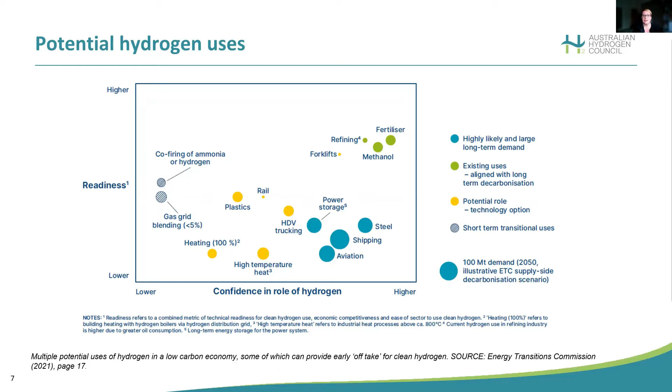We see here that there's also a medium confidence for hydrogen in heavy trucking and high temperature heat processes with different degrees of readiness. And we can also see a high readiness for co-firing ammonia or hydrogen in power plants. Also shown here, we can see very heavy transport, such as shipping and aviation, are less ready, but also represent sectors where hydrogen will need to play a role. And again, for shipping at least, this could be in the form of ammonia.

So this is how the AHC sees the necessary outcomes for the industry, where we use the economic, regulatory and social licenses to operate as a way to frame the issues. Now, the economic license is where we need the industry to get to scale. It's not yet commercial, and the investment gap is more than the private sector will fill on its own.

There's the regulatory license, where the industry needs stable, meaningful and efficient regulatory settings. Customers, communities, investors and our trading partners will all be looking for a degree of regulatory consistency and certainty. And then there's social license, which allows for trusted customer and community relationships. So we're looking at a significant energy and economic transition in the coming years and decades. And collectively, we need to establish engagement approaches, communications and information for a range of purposes. So for us, we're looking to get the policy settings in place to reduce these investment and knowledge gaps, to encourage the market and to really achieve and maintain these licenses to operate.

This is just a little bit more about how we can get to those outcomes in the previous slide. So as we know, we will get there with local and international funding and investment, with strong and positive trading relationships, such as the one between Australia and Japan. There's a need for research and public communications to make sure that everyone is coming along for the journey. And then there's the need for laws, standards, regulations to provide that consistency that I mentioned before, as well as, of course, an industry that is able to comply with those regulatory requirements.

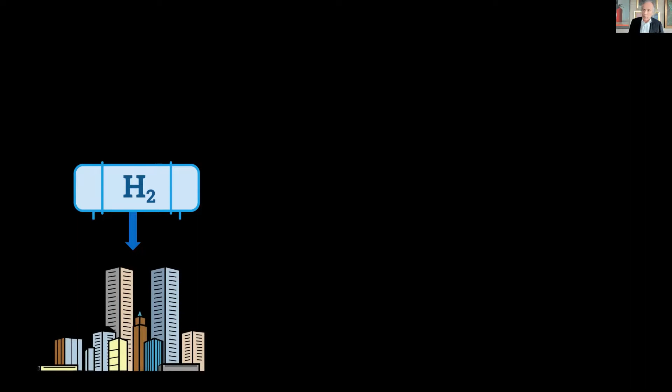The trouble is that even though electricity is incredibly versatile, it's not the most convenient way of delivering energy 100% of the time, maybe 80 to 85% of the time, but 15 to 20% of the time, we need some molecules, a high density fuel or a chemical for industrial purposes. So enter stage left, hydrogen, which can be used in the built environment for building heating and hot water, in industry for steel making and other purposes, and in heavy transport, for long distance heavy haul and for ships, and one day for aviation.

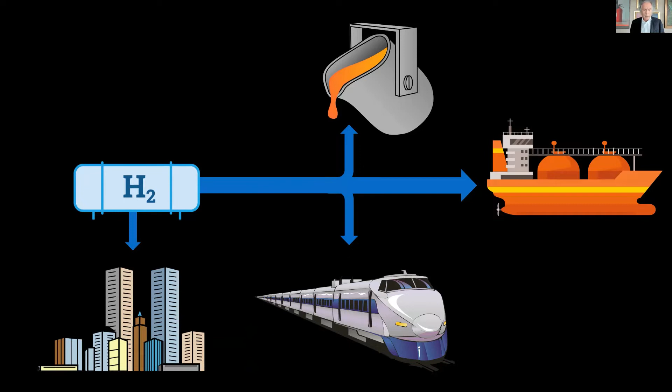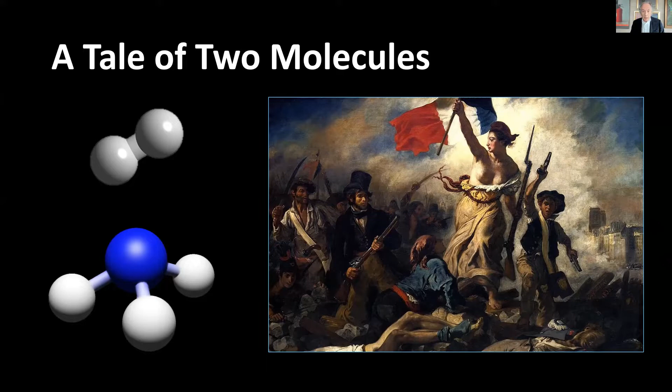And for a country like Australia in particular, hydrogen and its derivatives such as ammonia will be an extraordinary export opportunity. So I am talking about hydrogen, but truly this is a tale of two molecules, the hydrogen molecule and the NH3 ammonia molecule. I'm going to focus on hydrogen, but in many cases, the energy or the chemical value will be distributed and used as ammonia.

I'd like to tell you about the hydrogen dream, but I thought I'd stop and tell you about the hydrogen nightmares, the 3 things that wake me up at night. Even though the prospects are fantastic, there are some things we have to address. The first one might sound surprising: hydrogen storage. I hardly hear anybody ever talk about hydrogen storage, except for NASA.

Now, NASA, for the SLS, the gigantic rocket they're building for carrying 100 tons or thereabouts into orbit and beyond, the first stage is a liquid hydrogen, liquid oxygen stage. So NASA has built a massive liquid hydrogen spherical tank. I can't find how much it costs, but NASA doesn't really understand the concept of millions. It's probably $1 billion, and holds 653 tons of liquid hydrogen.

So if your interest was long-term deep storage, how much electricity is that? A little bit of arithmetic, bear with me. You need 30 kilograms of hydrogen to get a megawatt hour of electricity. That's the chemical content. But with maybe 50% efficiency, you need about 60 kilograms of hydrogen for a megawatt hour, or 60 tons of hydrogen for a gigawatt hour.

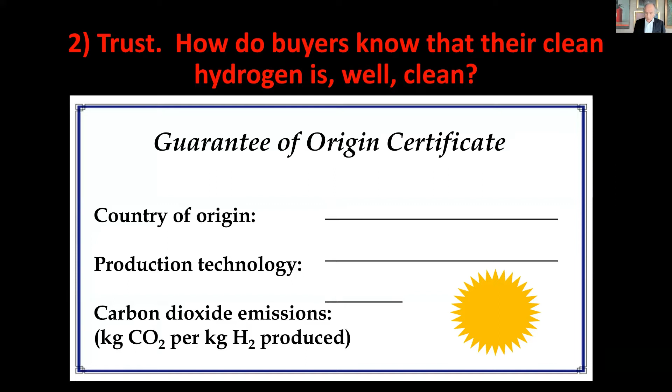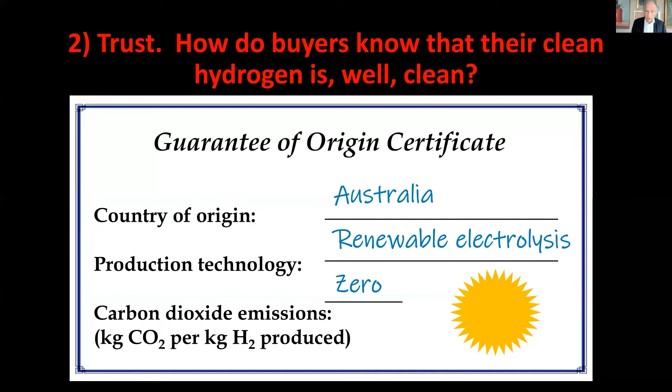The single important metric is how much carbon dioxide was emitted in production per kilogram or per tonne of hydrogen. And the Australian government and international counterparts are developing such a guarantee of origin certificate, but I see that as one of the most important requirements for a credible international trade in hydrogen. And it's moving slower than I had hoped.

So we have a responsibility to build the alternatives. You can't just shut down fossil fuels. You have to build the alternatives that will replace them. And we really don't have a lot of time. When a challenge is long in duration and difficult, the most important time to start is now. And we have started, but we need to build up the speed. And the challenge on building up the speed is more on the demand side.

I am convinced that in Australia, for sure, producers are poised, and we'll hear more about this today, to produce massive quantities of hydrogen. But they need offtake agreements. We need to build the demand. At the moment, if you look at the supply and demand equation as a chicken and an egg, the chicken's much bigger and the egg's very small. So what will make the egg bigger?

Well, if we start using hydrogen in storage for regenerating electricity, that will build hydrogen demand. And the egg gets bigger if we start using it in transport; that will build demand. If we use it in industrial feedstock, if we do gas blending, if we build on that export potential, we will be building demand in Australia and in other countries. Let me give you some examples very quickly of how we can do that.

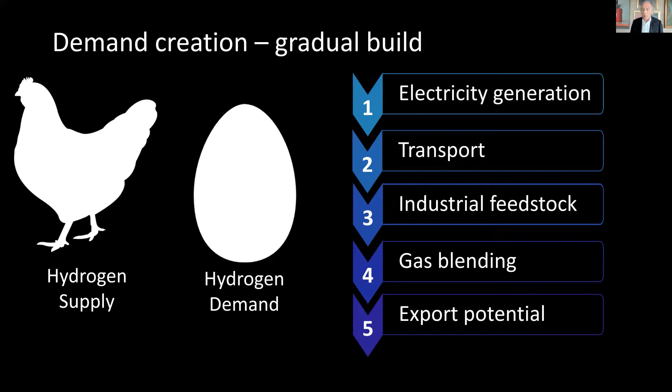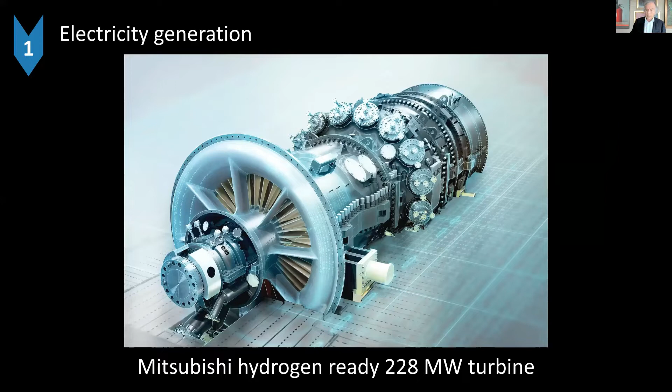Electricity generation: in Japan, Mitsubishi and other big generator turbine companies are preparing their turbines to be hydrogen ready. This particular 228 megawatt turbine is the sort of turbine you can buy from Mitsubishi today that will run on natural gas today, but it's field upgradable to ultimately run on 100% hydrogen.

For the existing coal-fired generators, Japan has a clear strategy to use ammonia made from clean hydrogen in co-firing, and the conglomerate called JERA is quite committed to getting to 20% ammonia in at least one large coal power plant by 2024.

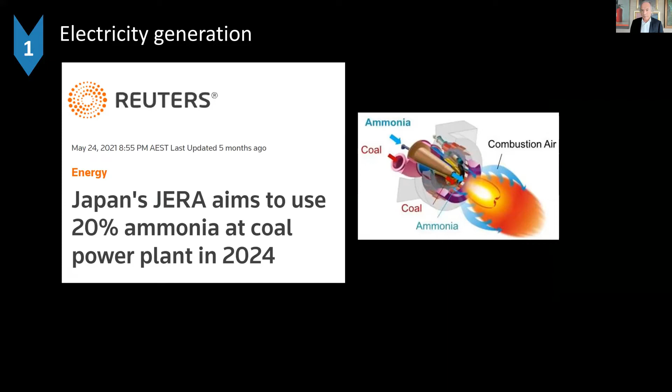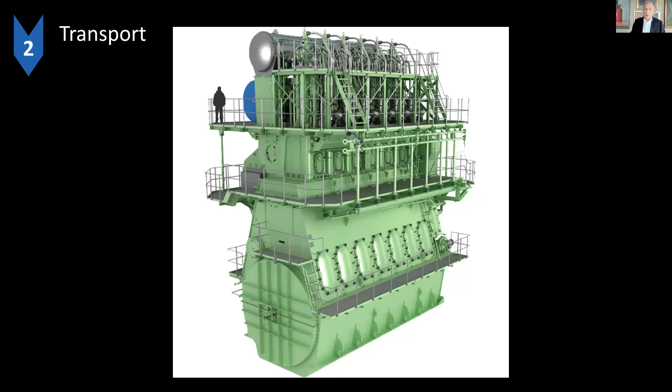But the big end of transport also needs a solution. What I'm showing you there is a picture of a marine diesel engine. They are absolutely enormous, and all the big manufacturers around the world have programs in place to modify their diesel engines to run on ammonia as an alternative to running on diesel.

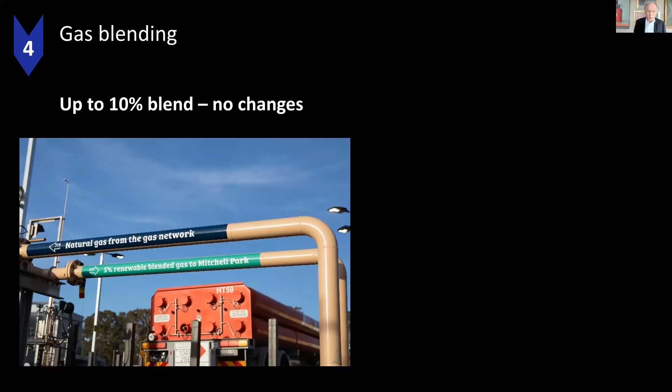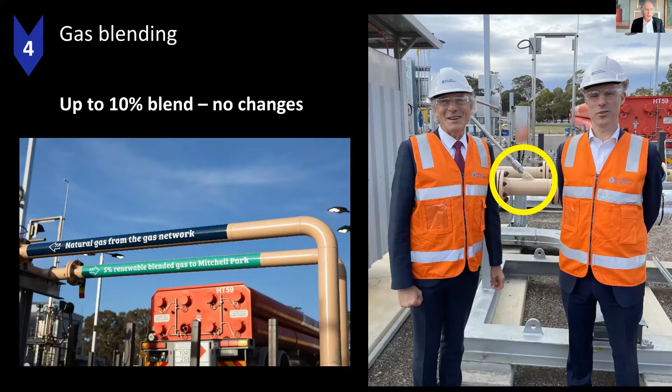Gas blending into the reticulated gas network. Recently, just a few months ago in South Australia, they launched a program for about 700 homes to operate on 5% renewable gas. I was there for the launch with Ben Wilson, the CEO. What's more interesting than the picture of myself or Ben is inside the yellow circle, you'll see the point where the hydrogen is coming down and injecting in and mixing with the natural gas going back to the people of the Mitchell Park community.

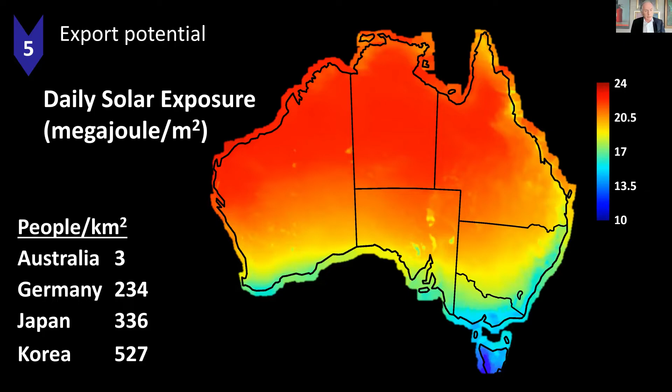Export potential for Australia: we have, as you are well aware, terrific solar exposure and wind as well. That's just a map of the solar exposure. We have the other benefit of a low population density. In Australia, it's only 3. In Japan, it's 336. So our solar and wind, combined with our land and our project experience and financing, make us well set up to be a substantial exporter of clean hydrogen and clean ammonia. As does our location on the map.

And our government policy, as Fiona was indicating, is very important for advancing an industry like this. This is a new and difficult industry. We are investing in this for external reasons, not because it's obviously the cheapest way forward. And so government policy has to help it along. The Technology Investment Roadmap is the signature approach that the Australian government is taking. I'm the chair of the panel that advises on that.

The principles are to achieve net zero through the use of technology, low emissions technology, while supporting jobs, industry and exports, and ending up with low cost, reliable energy for everybody.

In a sense, our vision is to have our cake and eat it too, or as was said by somebody famous, cake, have, eat. Now, who said that? You probably think it was Yoda. It wasn't, it was Boris.

The roadmap has a small portfolio of priority technologies, and each of them has a stretch goal. So the 5 technologies currently there, and it will expand when we come out with the update in a few weeks: clean hydrogen, electricity storage, zero emissions metals, carbon capture and storage, and soil organic carbon measurement. As I said, each of them has a stretch goal. For hydrogen, it's the famous one, hydrogen under $2 production price, so at the farm gate, if you like.

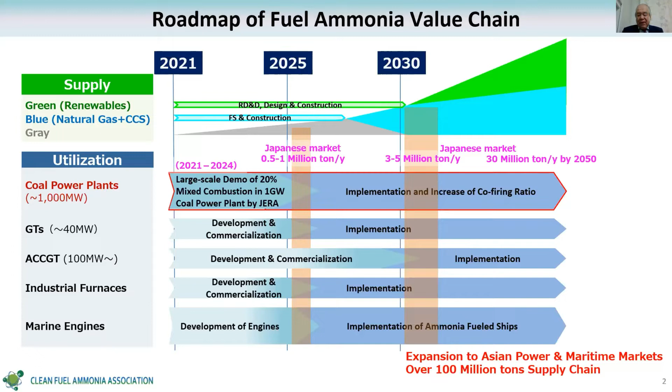If you look at the supply side, our key target is to develop the green ammonia supply chain, but our strategy is to develop a sizable market by using cost-effective blue ammonia. And once the market is developed, we will introduce green ammonia, and the growing size of the green ammonia supply will reduce the cost of green ammonia production, and in the 2030s, green ammonia will be the major supply of clean fuel ammonia. Next, please.

There are a lot of potential green and blue ammonia supplies from Australia: Western Australia, South Australia, Queensland, and Tasmania. Some of those projects are fairly large, like the Asian Renewable Energy Hub Alan mentioned, with 20 to 40 gigawatts of renewable power to produce more than 1 million tons of hydrogen, more than 10 million tons of ammonia. We are planning to deploy large vessels to transport large-scale ammonia supply, with a capacity of 50 to 80,000 tons, which is double or triple the existing ammonia carriers.

And we are planning to develop large-scale import hub terminals in Japan, and then develop a secondary delivery system to supply clean fuel ammonia to the various locations of potential users to accelerate decarbonization in Japan. And ammonia is easy to store, easy to transport, so this kind of system can be applied to the ammonia delivery system.

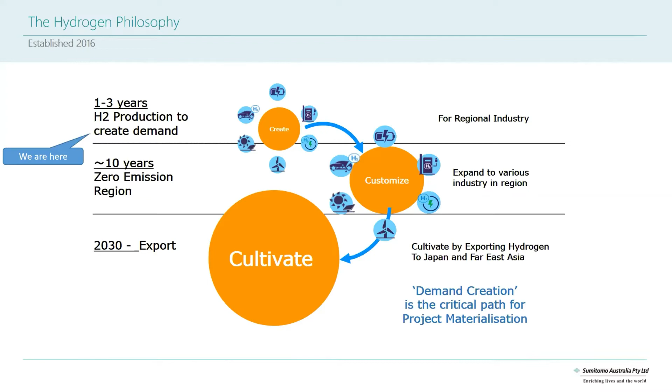So how do you create that early hydrogen industry? Early promotion, support and advocacy of hydrogen industry is crucial. Sumitomo has some early roots in hydrogen programs in Australia. One of the earliest programs that piqued our interest was the Advanced Lignite Demonstration Project. Seeing the writing on the wall for hydrogen, we also sponsored the CSIRO National Hydrogen Roadmap in 2018, which was an essential report responsible for triggering huge interest in hydrogen in Australia.

Now, it's also important to support our NERA technology clusters, who are tasked with building skills, capability, and commercialization opportunities for hydrogen. Without support and facilitation from key industry players, it is a challenging environment for the hydrogen industry to thrive. Similarly, supporting our universities, who are at the forefront of research, technology development, and the evolution of industry, is essential. These are all important activities in the creation phase with pathways towards decarbonisation.

So how else do you create? By building your hydrogen credentials. One of the great things about being a trading house is our access to hydrogen projects at all points in the value chain globally. Whether it be investing in hydrogen technology specific venture capital funds, looking at hydropower to hydrogen in Sarawak, Malaysia, using MCH as the export vector, mining decarbonisation opportunities, or engaging in the design of a smart city centred around hydrogen energy, all of these projects build those hydrogen credentials, which are critical to the creation phase. And these are the credentials which bring so much value to our Gladstone hydrogen ecosystem project.

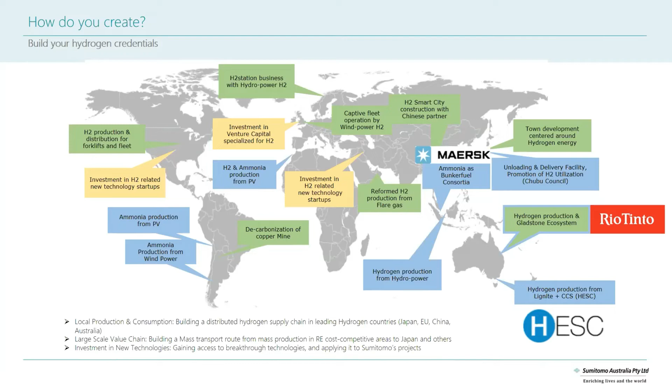So I think this may well be the only time that I agree with a headline from the Courier Mail, but they're quite right that Gladstone will be the hydrogen capital of the world. Sure, there's great solar radiance and reasonable wind turbine projects planned, and that port, now she's a beauty. But what makes Gladstone really attractive is its industry. Industry that is hugely energy intensive with significant carbon emissions. Gladstone is attractive as the hydrogen capital of the world because of its domestic opportunity.

So how do you create? Through bringing together those foundational partners who will help materialize a hydrogen ecosystem. Earlier this year, we partnered with some of those organisations, Gladstone Ports, Gladstone Regional Council, Central Queensland University, and AGIG. All of these organisations are motivated to deliver the hydrogen industry to Gladstone. The group provides key facilitation as well as offtake opportunities. It is the beginning of a long-standing partnership.

Now, we're also working on social licence in Gladstone, really bringing the community along for the ride on this. We've co-created a hydrogen vision with Gladstonites, and we're really excited to be delivering that later in the week in Gladstone. Now, backing up all of this work, Sumitomo announced a letter of intent with Rio Tinto, key aluminium industry players in Gladstone. Rio Tinto are investigating the use of hydrogen to replace natural gas in their calcination process at the Yarwun refinery, and Sumitomo is investigating the supply of hydrogen for that opportunity.

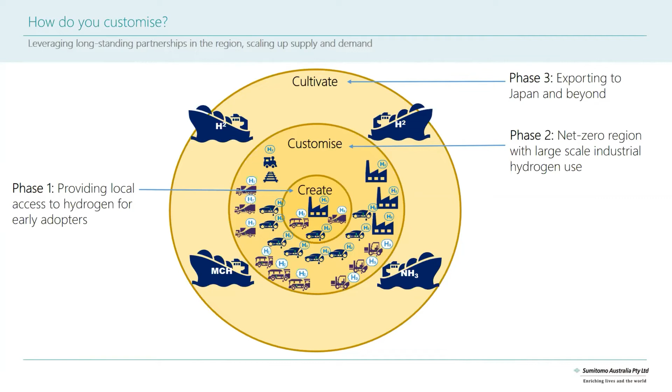There's considerable offtake there. But the real opportunity is in industrial heat. Hydrogen is a great replacement for natural gas, and with so many industrial organisations setting 2050 and even 2030 carbon emissions reductions goals, there is a role for hydrogen to play. Gladstone in particular is Australia's best opportunity for this, with hundreds of thousands of tonnes of hydrogen required, a real decarbonisation opportunity.

So cultivation. This is where we talk about export. As a trading house, all paths will always lead to export, balancing that demand and supply. And we see ammonia as a really key pathway for early adopters of hydrogen, one of the earliest opportunities for industries to commence decarbonisation. The existing supply chains and demonstrated applications really make NH3 a credible vector for early users. Co-firing of ammonia in coal-fired power plants, as mentioned by Muraki-san, opens up huge opportunities for the ammonia industry to help carbon-emitting power infrastructure companies get ahead of the 2030 Paris Agreement targets.

Now, we are working on a consortium in Singapore, including Maersk no less, who are determined to use ammonia as a marine bunker fuel replacement. Ammonia-powered shipping vessels are already being developed. The time for ammonia is right now.

Now, on behalf of this consortia, Sumitomo this year issued a request for information for blue and green ammonia projects and their earliest available supply dates. An RFP for this project is not far away for supply by 2025. Now, when you have a player like Maersk wanting access to clean ammonia as a marine fuel alternative, the decarbonisation of shipping fleet is here at our doorstep.